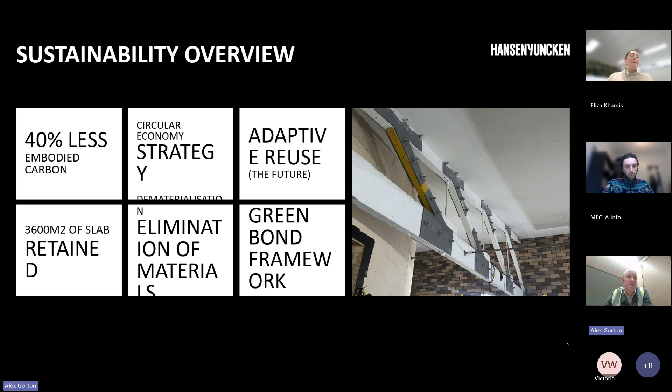In that ECI, when we got into it and started getting tender docs, for the design team, mass timber was a key element to the whole project. GLT and at the time CLT featured throughout, but the design team wanted to keep it local. They were really interested in getting that warmer hardwood Aussie timber in that structure rather than the pale pine Scandi mass timber. And so trying to keep it local, keep it within Australia was a key for everyone.

And whilst we looked at getting it from overseas, we came to the conclusion that by shipping the timber across from the Scandi countries, it doesn't actually add a huge amount of carbon per square or per cube to the timber. It really came down to more aesthetics for us with the local supply timber. But there was really only probably one supplier in all of Australia at the time, and I think probably still is, that could do a project of this size.

So we've got approximately 660 cubes of GLT structure on the project. The timber itself was all sourced from Tasmania through various PEFC certified sources. Our external facade timber fins, the mullions, are also the same GLT format. The primary roof structure and then feature ceiling and cladding throughout are also made of timber.

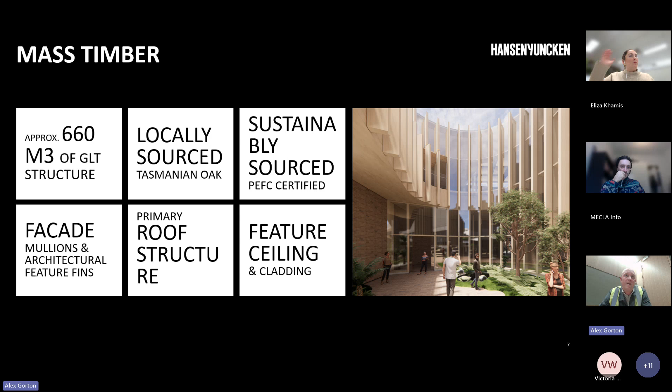So we went over and had people over there getting an understanding of what those limitations were, and a design manager on site here who really got in there for a good two months, really a 5-week intensive period, but a good 2 months, in an effort to try and optimize the design we had for our mass timber structure to suit the parameters and limitations of Vikash.

So I've just got a slide here that talks to some of the initial drawings we had and what was being flagged as some of the limitations and issues with that initial set of documents. And Vikash, being a supplier that does this day in, day out, they're pretty used to seeing documents coming through from consultants who may not have a huge amount of experience in documenting mass timber structures, and that was something we experienced here.

And you sort of see this is the initial set of drawings that just had really big steel plate connection details, lots of different connection types. So there wasn't a huge amount of consistency amongst the different scenarios we're experiencing on site. And also there was a tendency to really just change everything to timber where they could. So anything that would have traditionally been steel, they were looking for ways to make that timber.

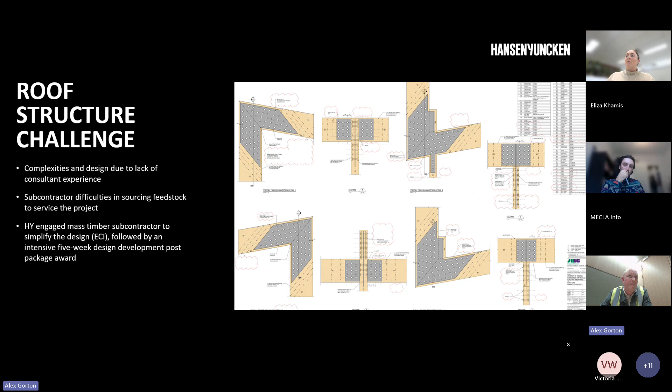So as I said, we got Vikash on board, engaged them under an ECI style contract similar to what we'd been engaged under, and then really went about trying to understand those limitations that existed with Vikash. And a lot of these limitations don't necessarily exist if you go to the bigger European suppliers of mass timber, but if you do want to keep it local here in Australia, these are just things that you need to consider when it comes to mass timber.

So for someone like Vikash, think of the way they produce mass timber being a factory, a process similar to cars, and the timber starts at one end and comes out the other end. If at any point you've got a bottleneck in that process, it causes a flow-through effect throughout the whole process before it. And so if they're pressing timber and getting what they call the blanks, the big solid bits of timber, and that's coming together faster than they're getting it through the various CNC machines, that build-up of blanks builds up behind them. And so they're really looking to optimize the pressing to CNC ratio, so it's all just moving smoothly through the production line.

So we had to really understand how much time we were allowed in that CNC process. And so things like limiting the various different types of members. We went for a process of rationalizing the sizes to try and get a bit more consistency, trying to get a connection detail that worked in more situations. And then with their machinery, we learned that their CNC machine can remove 8 mil of material in any single pass. And then there's also a 150 mil dimension restriction without them having to move and play around with the actual member itself.

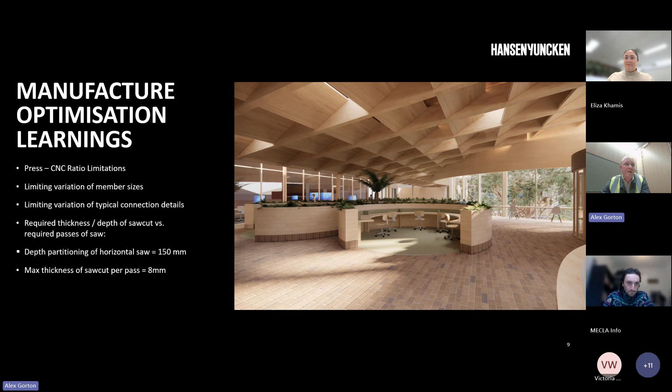If you can imagine the structure, it's a waffle structure, and you've got these very big loads going through these points here, basically moment connections that have huge loads going through them. Some of these beams span 18 meters. 18 meters, 11 meters, 13 meters are three of the common lengths of beams that we've got, and so pretty big loads go through them.

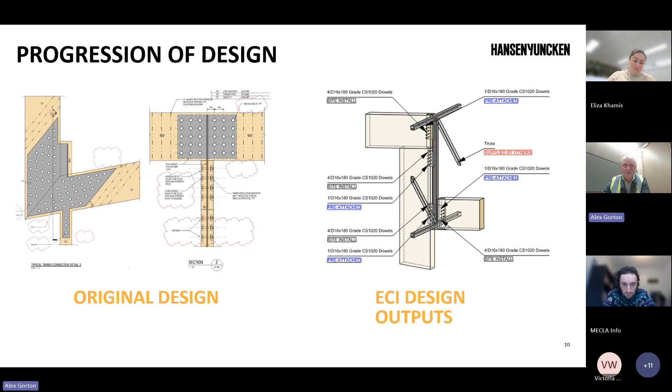It was at this point we were really running out of time to try and make it into a production slot for the project, because you still had big steel plates. These screws had to have an element of CNC machining and routing implemented into it, and again, it was just not standardized across the different scenarios that we ended up experiencing on the project.

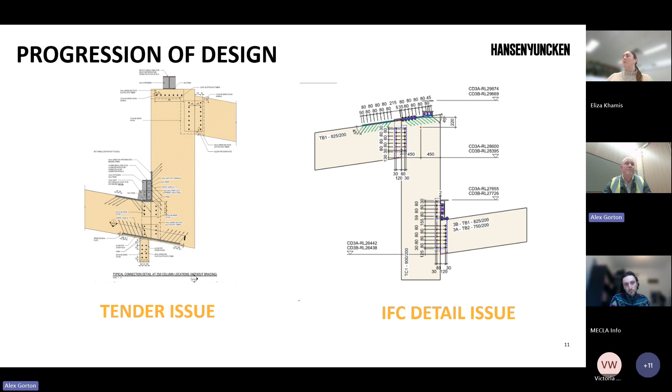So we needed to find the compromise, introducing a little bit of steel, and then we saved both money and timber volume. So there is really just a 3D perspective of what we ended up with in terms of our final structure. That's exclusive of the fins and the mullions and a lot of the facade timber, but that's how we integrated the mass timber structure into the overall structure.

What you can see there is the stuff in red. That's actually structural steel in the end, and that was originally timber, but the introduction of the red steel elements just made the whole thing a lot easier to work, and Vikash were able to do it. In this, you can see where the dome sits in this space here. This is that section of a lightweight 1970s PT slab that sat in the middle. We demolished the roof structure and had just the first floor structure left for us to build up from with our mass timber structure.

And then parts of this back are all existing structure, existing precast structure, facade, where we've modified, removed the roof, put more timber in, modified the facade. But that's where we landed with the mass timber on this project.

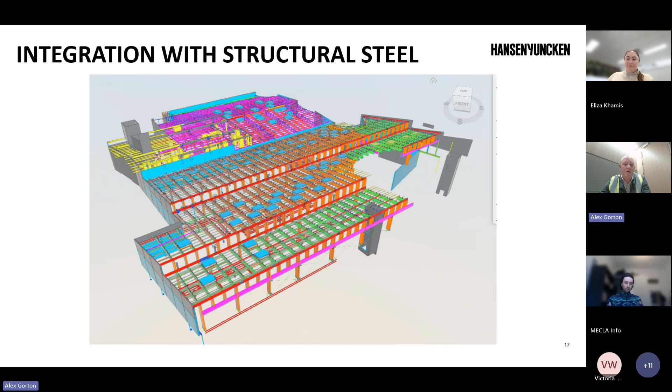And then another element that was key to the overall project was the extensive use of hempcrete. When all things are said and done, this will be the largest application of hempcrete in the southern hemisphere. For those that aren't familiar with hempcrete, essentially it's a mixture of lime, sand, hemp fibers, and water. It gets mixed up, batched, put in a form very much like rammed earth, and then over a 6-week period, there's a chemical reaction. It all calcifies and pretty much gets rock solid.

So from the outset, when we first got the ECI documents, the University of Tasmania had expressed an interest in trying to get hempcrete across the line for use on this project. Tassie is probably the largest grower of hemp in Australia, and the university had done a couple of collaborations and experiments with some growers here in Tassie, so they were keen to try and convert that into an industry in itself. But when we first got involved in the project, hempcrete hadn't been approved for use on a commercial building, so it didn't have any of the fire or group testing that was required to be used on a project like this.

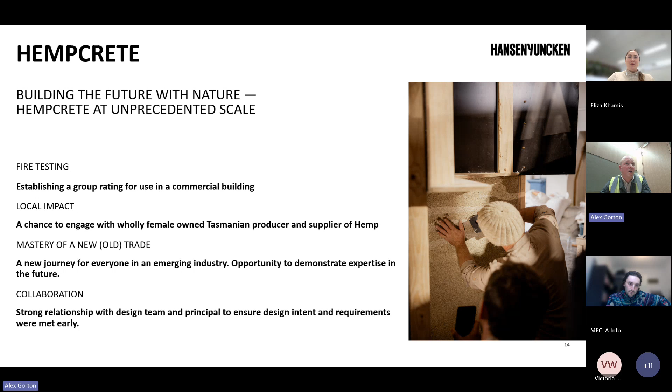And then really just to finish before potentially some questions, I've just got a couple of screenshots there of some progress on site. I'm not the best photographer, but they give you an idea of where we're at now on site and how the mass timber and the hempcrete are starting to take form, take its place on site, and actually demonstrates how those initial concepts and renders that we were initially working to are actually starting to look like that in real life.

And then probably just a few other things that are probably important for this group: the other idea for the spaces that was designed and the roof structure itself was, everything had to be freestanding. So what we've ended up building is essentially a large warehouse space, a barn with the mass timber structure, which is why it's got such big spans and loads. We've built this big warehouse, and then all of those various little rooms and pods and spaces within it are freestanding, and they've got their own supporting structure, and in some cases their own mechanical services.

And this then gives the university a bit of flexibility if in 20 to 30 years' time they decide to change how they actually provide teaching. And so they go from what is now an average classroom size for the university of around 35, 40 students, and go back to what was, 20, 30 years ago, an average class size of 100, 150 plus. They can actually hoard off areas, be working within that hoarded area, changing, adapting these spaces to suit that new teaching style, while still operating the university and providing teaching in spaces that are only 10 to 15 metres away.

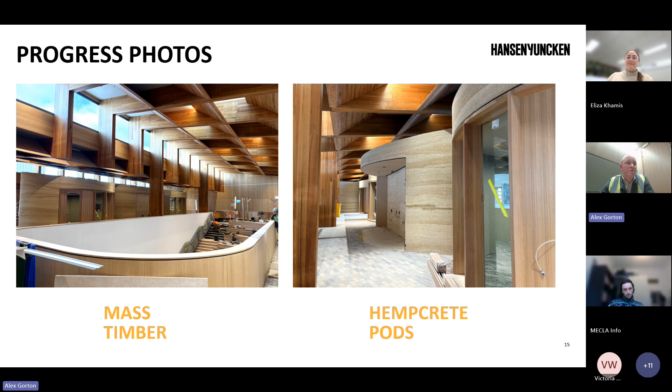And so that adaptive reuse of the future has already been considered and how they might adapt these spaces, like I said, if teaching was to change again in 20 years' time. And that really is a bit of a snapshot of some of the initiatives we've got on the UTAS Forestry Project. So thanks, Eliza, I've blasted through it, and we've got some time there for questions if anyone has any questions.

Thanks, Alex. That was awesome. Yeah, let's open up to some questions. I've got a few, but I'll let someone else speak if they'd like. Just chuck your hand up, we'll call on you, and you can ask away. And if there's a deathly silence while people are thinking of what they want to ask, I might go first. Oh, no, Elizabeth. Hello. Thank you. That was a great presentation.

I do have a quick question. Were you aligning to a formal building certification, or using a sustainability certification or framework? No, so they've assessed it against Green Star, but aren't necessarily going for Green Star ratings. It's more so the green bond framework, and the reduction in embodied carbon is the driving force really for a lot of the decision making. So at the end of the job, there's a requirement. We are providing EPDs and doing an as-built carbon assessment, but that's predominantly being driven by that green bond framework, but no certification. Okay.

Thank you. And also for the reduction it was only embodied carbon, right? It didn't cover operational carbon? Embodied carbon, yep. Tasmania is quite unique in the sense that, because I think 98 or 99% of the power generated in Tasmania is hydro, and power is typically the single biggest contributor to operational emissions, the weighting of what's more important to consider changes in Tassie. So really trying to reduce the upfront carbon is much more important when constructing in Tassie. Great. Cool. Thank you.